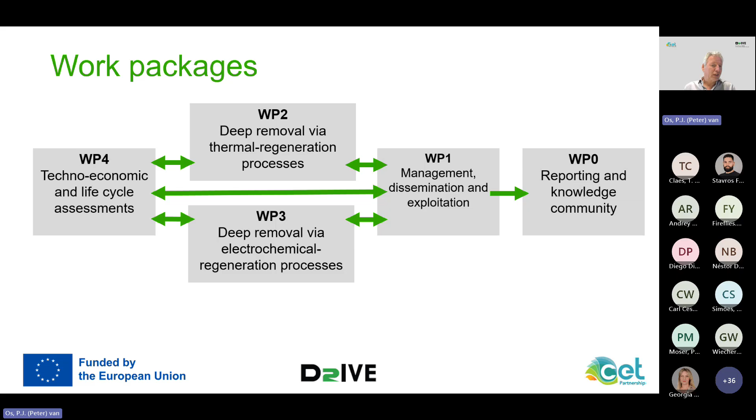In work package 2, we look at CO2 removal via thermal regeneration processes. In work package 3, we look at CO2 removal via electrochemical regeneration processes. And work package 4 concentrates on the techno-economic and life cycle assessments.

This is a graph that we made in the project proposal about the work that we do in DRIVE. The thermal regeneration technology is based on amine CO2 capture, where we go to very deep removal rates. In the electrochemical regeneration, we look at 2 technologies that are being further developed in the project. We also have a techno-economic work package that looks at a lot of different cases: cement, waste to energy, coal-fired power, and combined cycle power, considering different capture rates. We also want to compare the thermal and electrochemical regeneration processes.

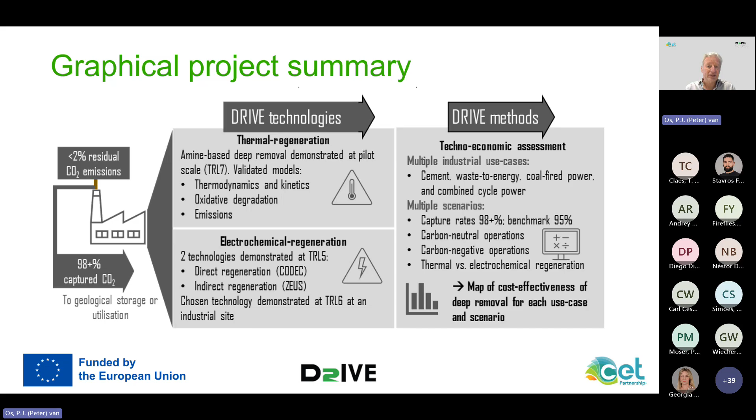This is an overview of the TRL levels that we have in DRIVE. CODEC and ZEUS are being further developed in the project. There was already a basis, but we'll try to optimize both processes and demonstrate them in the lab, and also increase the performance of both processes.

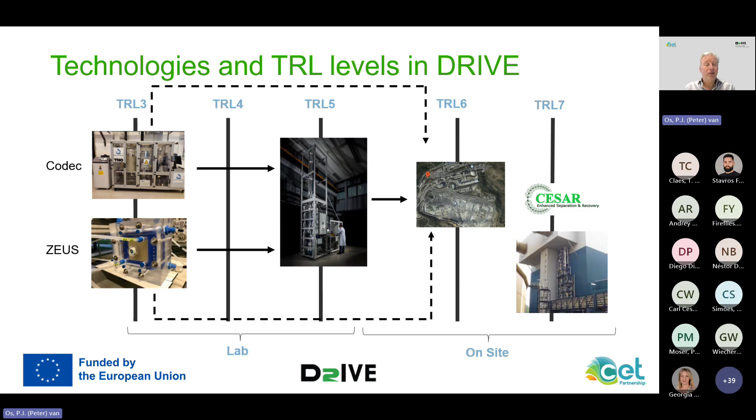In the lab, we will also test it with a CO2 capture plant. We have a small complete CO2 capture plant called the mini plant, and both technologies will be operated in the lab. Then one of the technologies will be selected for an on-site operation at a plant of Cemex in Czech Republic, where we will transport our mini plant and one of the 2 electrochemical setups, and operate there with the flue gas of the Cemex plant.

Of course, the CO2 capture with amines already has a much higher TRL level, and we are using the CO2 capture plant of RWE in Niederaußem to really look into the deep removal of CO2 using this plant.

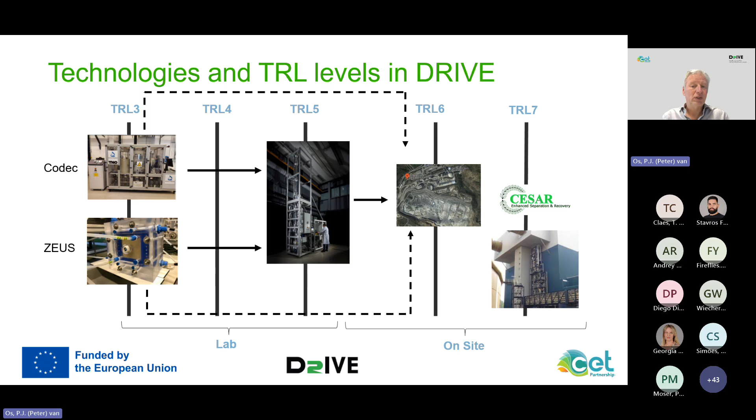The project objectives: we really want to demonstrate deep removal at TRL 7 at the RWE plant with CESAR1 solvent. Quite some campaigns have already been done, and we are still further testing the solvent, concentrating on energy demand, emission degradation, and how it will operate. Peter Moser will tell more about this in his presentation.

Katarina and Diego will present the electrochemical regeneration technologies that we want to further develop in the project. In the last year of the project, we will operate one of the electrochemical setups in the Czech Republic, with a clear target for energy performance. At the end of the project, all results about technical, economical, and LCA aspects will be presented and published.

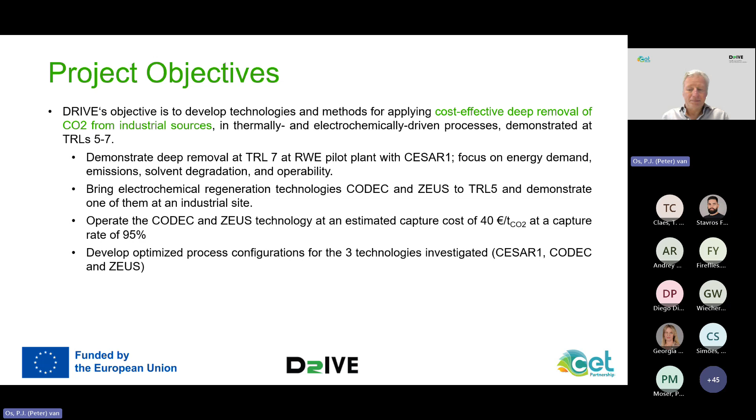What we really want to do is develop this electrochemical regeneration method much further, try to make steps in TRL level, and also see what it can mean for us and for the CO2 capture community in terms of performance and emissions. We really want to see if for the amine technologies, very deep removal works, and what the cost will be in terms of extra energy, degradation, and things like that.

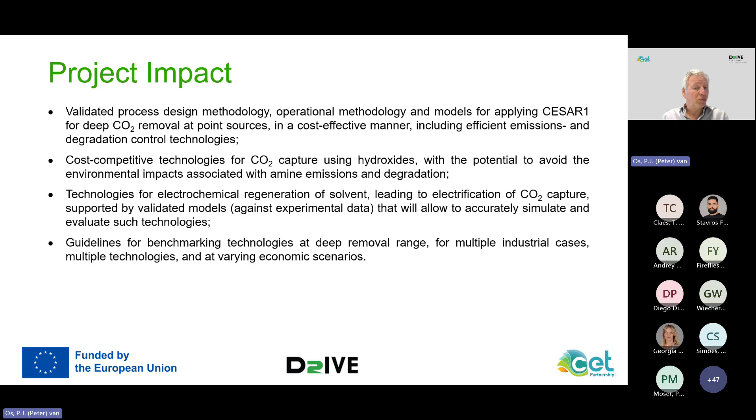So we have a very big demonstration activity in Drive, and we want to look for these multiple cases, what the benefits will be in different scenarios.

We tend to do a lot of dissemination in the project. We already have a website active since the beginning of the project, where we present our newsletters, results, and also the recording of this webinar will be uploaded.

We have a LinkedIn page where we regularly post news about the project, and a YouTube channel where we also post video material about the project. We're also preparing some video material about how the technologies we develop work, and of course we try to be present at major conferences to disseminate our results.

So this is still an overview of our partners. I think we have a very nice consortium with very technical, very specific targets, which gives a good direction to the project. And of course, we want to thank our funders for making this project possible. So this is a very short introduction.

I think we should now switch to the technical work packages, and I would like to hand over to Peter Moser from RWE to present on the thermal regeneration results.

Okay, thank you, Peter. I will share my slides. I want to start my presentation about this work package 2 on thermal regeneration processes for deep removal with an introduction of the objectives of the work package.

Our main goal is to confirm technical feasibility. We are not talking about achieving the highest capture rate for just some hours - we are talking about 24/7 operation in long duration tests. We want to understand and assess the impact of deep removal on key performance indicators: energy demand, emissions, solvent degradation, but also operability. Do we see effects you normally don't see at normal capture rates achieved at amine-based capture plants?

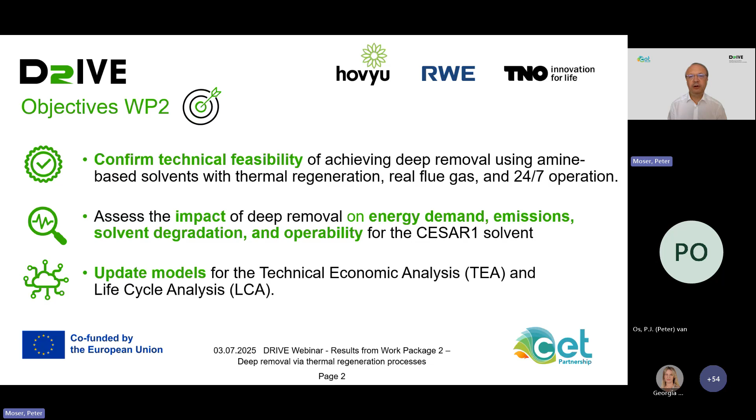We hand over this data to our colleagues in the other work packages for life cycle analysis, but also for techno-economic analysis. That means we can validate the modeling tools and understand what's going on in a process with deep removal, so that it can be scaled up for different use cases. So we have a quite holistic approach.

Our setup is that we use for the testing at Niederaussem the flue gas of a 1000 megawatt lignite-fired power plant. Our solvent is this aqueous blend of AMP and piperazine, the so-called CESAR-1 solvent, which you can say is now the working horse of the scientific community in Europe especially, but there is also, I think, more and more commercial interest in the solvent.

Our flue gas composition is around 14 to 15% by volume of CO2 and around 5% of oxygen. It's important that when we talk about the highest capture rate, we frequently calibrate our infrared analyzer for the depleted flue gas, since we have very low traces of CO2 left. We use a calibration gas with 200 ppm of CO2.

We tested different emission mitigation technologies. The benchmark is always a water wash, since this is the simplest configuration and helps you understand the process. But we also control emissions with a dry bed, or so-called OASE aerozone, as well as with an acid wash, where we usually vary the pH value.

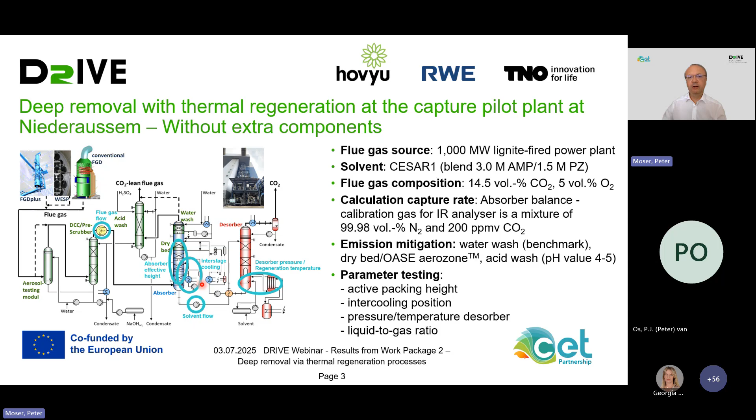But then we vary the solvent flow, the desorber pressure, and we also vary between using the full length of the absorber with 4 beds of structured packing or just 3 beds, the so-called dry bed configuration, which at the same time reduces emissions. We also varied the position of interstage cooling in the absorber, or tried operating without an intercooler.

Coming to the testing, we realized in total 5 testing campaigns, of which 4 have already been completed. In the first campaign, we operated the plant and tested whatever was possible, to gain hands-on experience on these highest capture rates and to get a nice set of data for the modeling tools.

In the second campaign, we operated with 3 active beds. In the third campaign, we had 4 active beds. I also have to explain that we have no permanently installed reclaiming system in the capture plant, so all trace components or degradation products accumulate over time.

After a total of around 15,700 operating hours, we exchanged the solvent. This was requested by another ongoing project at Niederaussem, and it was nice because we then had fresh CESAR-1 solvent in the plant, which was interesting for comparing performance.

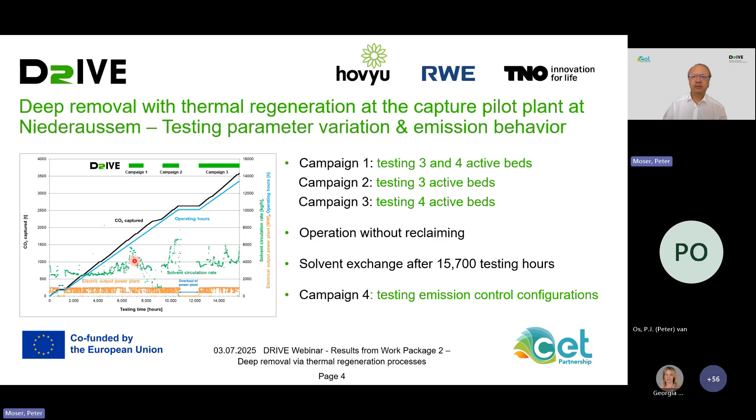You can see here this is the power plant output—when we have no flue gas, the power plant has a standstill and we cannot operate. But during this test, we significantly raised the solvent flow, doubling it or more than doubling it. That's just to explain a little bit how we tested it.

Coming now to the results regarding the key performance indicators—this is not astonishing: when we go to the highest capture rate, we see a quite steep increase of the reboiler duty. For CESAR-1, it's not so dramatic, perhaps until 99% capture rate, but if we go to the highest capture rates, it increases significantly. Nevertheless, you could say up until the range of 98–99% it's a moderate increase of specific reboiler duty, around 30%.

Regarding the aging of the solvent, the effect on reboiler duty is more or less linked to the amine concentration in the solvent. By degradation, depending on your solvent management, you are replacing active amine with degradation products, which sometimes still have an amine group and are active or provide alkalinity. Nevertheless, you end up with more inactive material in your solvent, which reduces the efficiency of the process—and that's also what we see.

For example, with 4-bed operation and 1.75 bar absolute pressure in the desorber as operating parameters, we see that we need around 10% more energy for the aged solvent, and this is mainly linked to the lower amine concentration.

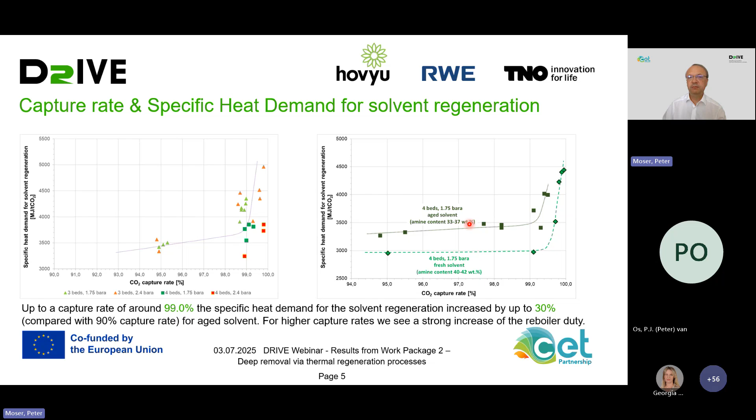Also important is the topic of emissions. We could confirm that at highest capture rates—here in the range between 98 and higher than 99%—we see the effect already observed in the Accelerating CCS Technologies project scope, which ended last year. We can confirm this also for highest capture rates: we see an increase in emissions for fresh solvent. Nevertheless, these emissions are quite too high for operating a plant, especially for AMP, but this data is important to understand the mechanisms of emission formation.

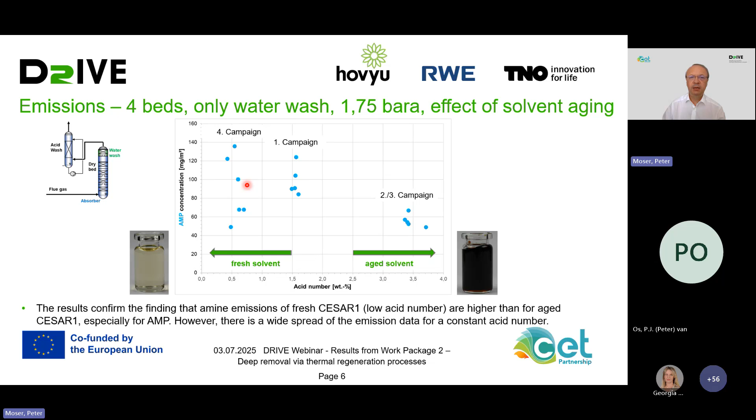Coming to the next slide, this shows that we have quite effective emission mitigation technologies available, so emission control for deep removal that works. We tested it under full load conditions of the power plant, but also part load conditions. Typically the emissions are a little bit lower at part load because we have less CO2 in the flue gas coming from the power plant, which means less heat of reaction from the carbamate formation released in the absorber, and then the volatile emissions go down.

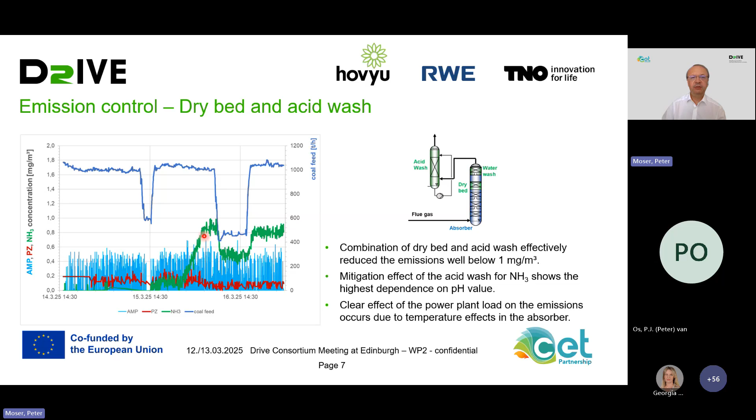You see also here the increase of the ammonia emissions. This is linked because we had variation of the pH value, and here we came a little less acidic, so higher pH value. Nevertheless, we have quite nice low emissions.

Important is to use the parameter data from the parameter test for the evaluation of the modeling tools, because in the end they will be needed for the techno-economic analysis. These are two diagrams we published at the GHGT-17 conference, results from 25 parameter tests. What we can say is that it's really quite good prediction of the behavior of the capture plant. For example, the key performance indicator capture rate is within 2% deviation between experiment and what the model predicts.

So this is nice, and what's also really promising is the prediction of the emissions. This is also quite nice, working well.

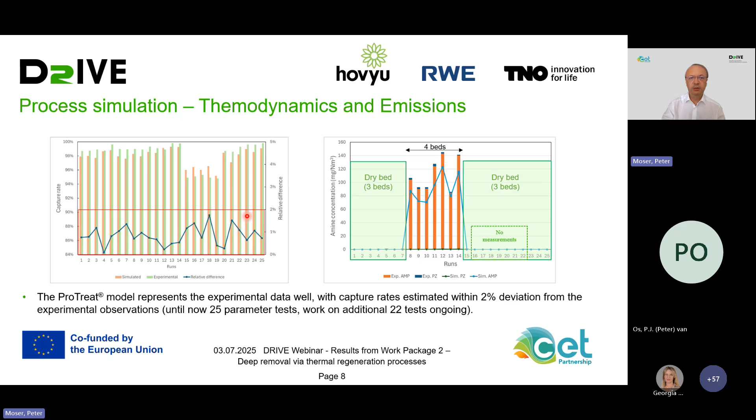For sure, you always have some scattering, and we see some underestimation of emissions which we are further investigating. There might be two reasons: one is that the equilibrium data might still not be accurate, though it has become much better as a result of the scope project, so there might still be some deviations. The other is that we might have to explain it by aerosol-based emissions, which cannot be predicted by the modeling tool. We use the ProTreat model, which seems to work quite well.

We demonstrated deepest removal, reducing the CO2 concentration in the depleted flue gas down to 91 ppm, which is really, really low. If we compare it with the concentration in the ambient atmosphere, we have to say 50% more specific energy demand that we need for it. So you can say that we capture, in the end, CO2 from the combustion air of the power plant.

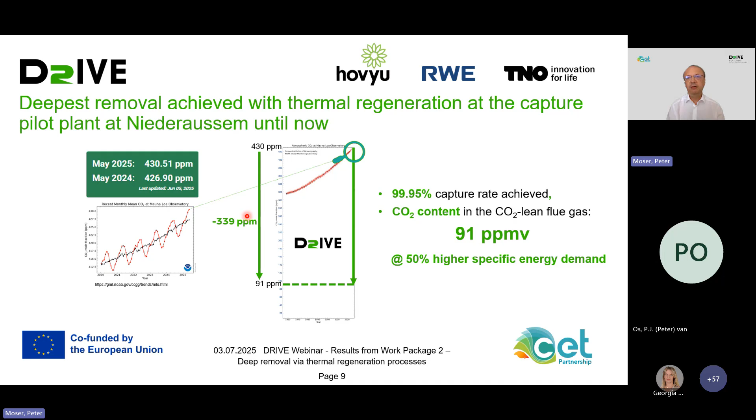This brings me to the conclusions. We have finalized 4 of the in total 5 testing campaigns, and we have shown that in principle it works. We have more than 3,800 operating hours now with capture rates higher than 98%, and CO2 concentrations below 100 ppm are possible, which was also one target of the DRIVE project. But we also have to point out that deep removal means a trade-off between highest achievable CO2 capture rates for climate protection, but on the other hand, higher energy consumption.

So what is now the conclusion from it? This will be the result of the techno-economic analysis and the life cycle analysis, which will investigate this for different use cases. We know that emissions can be controlled, and it seems that we have quite a nice simulation tool available to describe the behavior of the plant for these deep removal conditions.

From October this year, it is planned to realize the last testing campaign. This will be a continuous 6-month operation at deep removal conditions, and we will learn more about solvent degradation under these conditions. This will then also finalize the handover of data for the techno-economic analysis and the life cycle analysis.

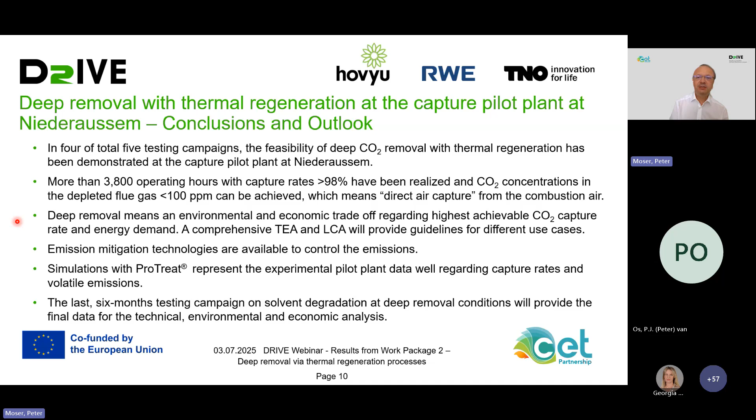Hello everybody, my name is Catarina Simões. I will be presenting work package 3 on the introduction to CODEC and ZEUS technologies, also with Diego from HOVYU.

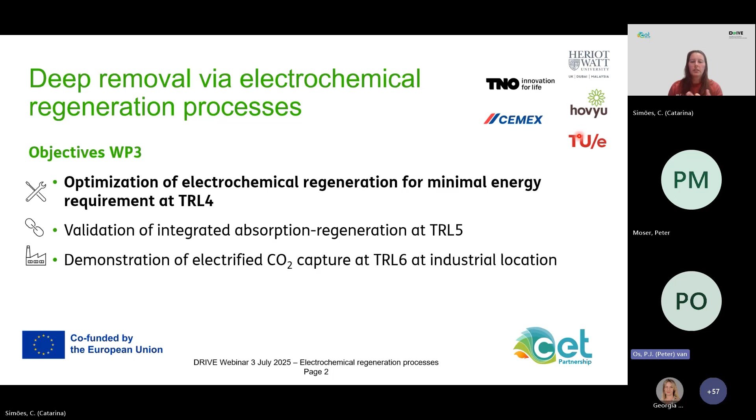Work package 3 is about CO2 removal via electrochemical regeneration processes. The objectives consist of optimizing the electrochemical regeneration for minimal energy requirement at TRL4, which is our current goal. Afterwards, we'll validate the integrated absorption-regeneration combination at TRL5, and finally bring one of the technologies to demonstration for electrified CO2 capture at TRL6 at the industrial location.

Why do we want to electrify the regeneration of CO2-rich capture solvents? There are several reasons. We can regenerate inorganic capture solvents, reducing the need for amines. We use inorganic salts like potassium hydroxide, which means no issues with degradation, and we can operate at room temperature, reducing thermal costs.

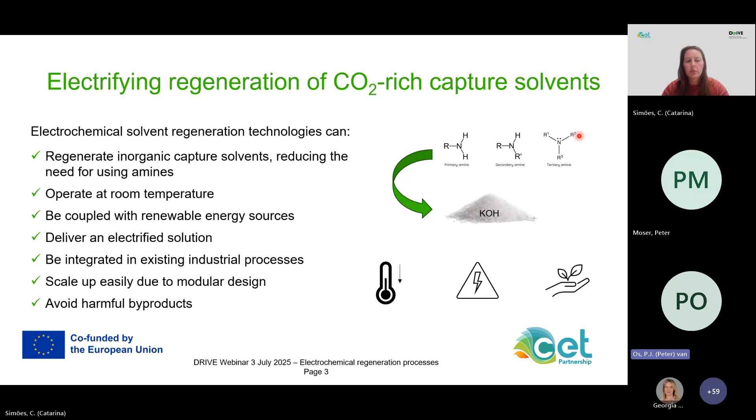We can couple this electrification with renewable energies, delivering an electrified solution, and it can be integrated into existing industrial processes. There's also ease of scalability, since the electrochemical reactors are based on a modular design, and we avoid harmful byproducts since the regeneration of KOH is constant.

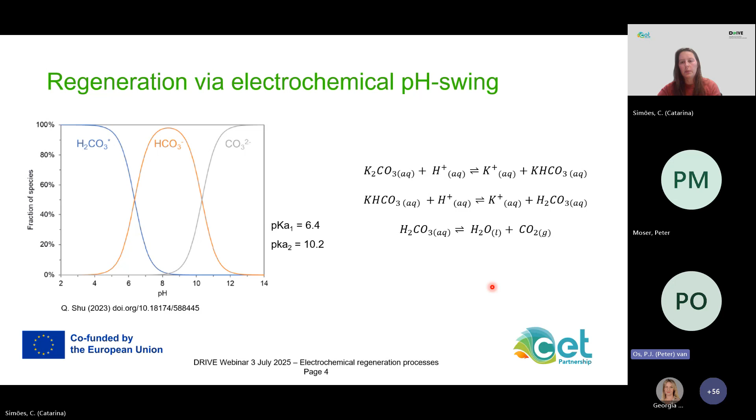On one side, we have CO2 release at the anolyte by acidification, as shown in the previous slides. At the same time, in the catholyte, we are regenerating the KOH, which can be directly used in the absorption step. The goal of this process is optimization towards 3 gigajoules per ton of CO2.

We also have water present in the system, which oxidizes at the anode, producing oxygen and protons. The protons react with the carbonate, releasing CO2 from the carbonic acid, along with oxygen.

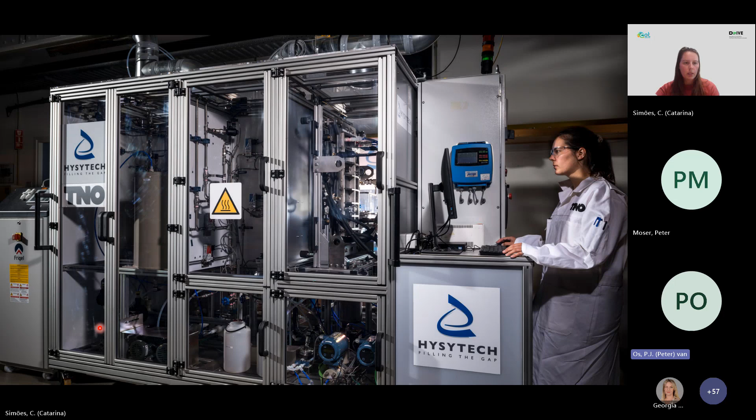This is how the setup looks in the lab these days. Here in this compartment is our electrochemical reactor. On this side is all the coordination of the sensors. Then we have the pumps, the gas management, and behind are the tanks, which can go up to 60 liters capacity.

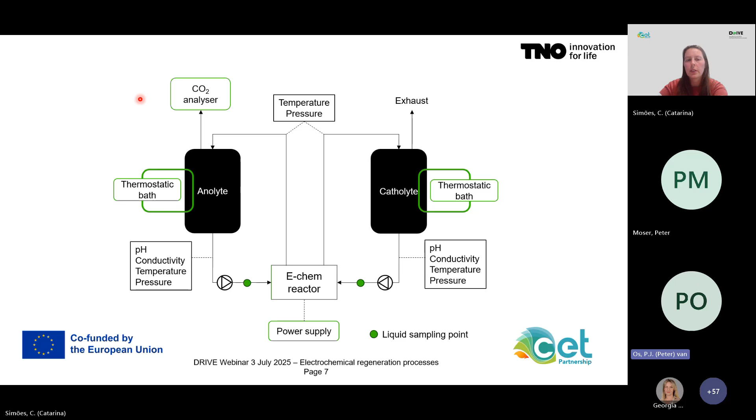This is a simple schematic of how it looks in operation. We're currently running in batch mode, so the anolyte is recirculating on this side. We measure in-line pH, conductivity, temperature, and pressure, and also take liquid samples. The catholyte is a mirror of the anolyte, but in the anolyte we still have a CO2 analyzer, so we can quantify how much CO2 is released from the system.

So we are doing optimization of CODEC. The parameters we're looking into are conductivity promoters, compartment geometry in the reactor, solution composition, and the applied current, which will also change the CO2 release rates. Finally, we want to implement gas diffusion electrodes to improve the system, because this will reduce potential losses and also avoid the mixture of CO2 and oxygen, which was still an issue in the last configuration.

We want to have a pure CO₂ outlet and not a mixture. So in this case, the setup becomes a bit more complex, and we now have two gas compartments from the anolyte and catholyte. We basically have a loop of hydrogen where we feed hydrogen to the anolyte, and this reacts instead of water. So now we don't have oxygen evolution. The rest of the system is rather similar.

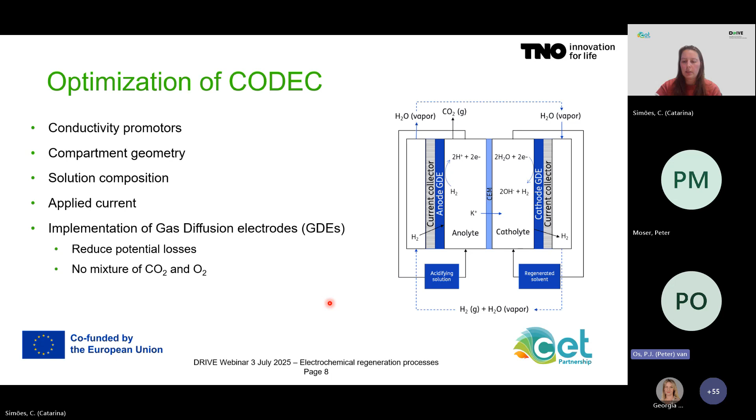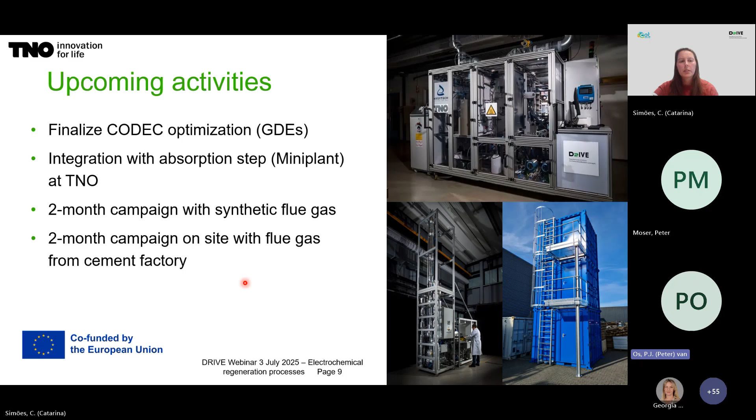For upcoming activities, today was just about showing how the technology works. We are now finalizing the CODEC optimization with the application of gas diffusion electrodes testing. Afterwards, the plan is to integrate with the absorption step, the mini plant. You can see pictures of how the mini plant looks, and both setups will be integrated together. With this, we'll have a 2-month campaign with synthetic flue gas, making an automated continuous system to test it. Depending on performance, there might be a 2-month campaign on site with flue gas from the cement factory. With this, I would also like to acknowledge the funding agencies and thank you for your attention.

And I'll now pass the word to Diego to continue on work package 3 with ZEUS.

It seems that my camera is not willing to switch on. Let's see if I manage now. No, we will try to solve this. Oh, now it's okay. Great, I'm here.

Okay, so continuing on work package 3. I'm going to present now the second electrified technology, which is called ZEUS, and that stands for Zero Emission Ultra Stripping.

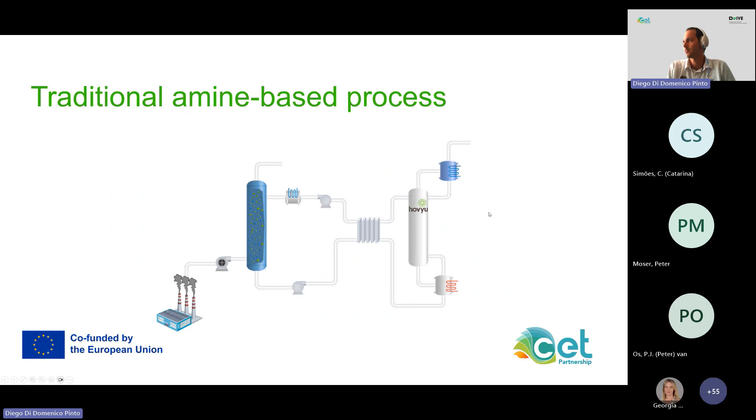For that, I want to give a small overview on a traditional amine-based process, which is the state of the art nowadays for capturing CO₂. In the traditional process, we have the absorber that removes CO₂ from the gas, and then the solvent is sent to a stripper, which works with thermal regeneration, as we saw Peter Moser present with the RWE plant. Then CO₂ leaves at the top of the stripper, and the regenerated solvent goes back to the top of the absorber. In our case, similar to CODEC, we want to exchange the regeneration part to an electrochemistry-based regeneration step instead of using thermal energy.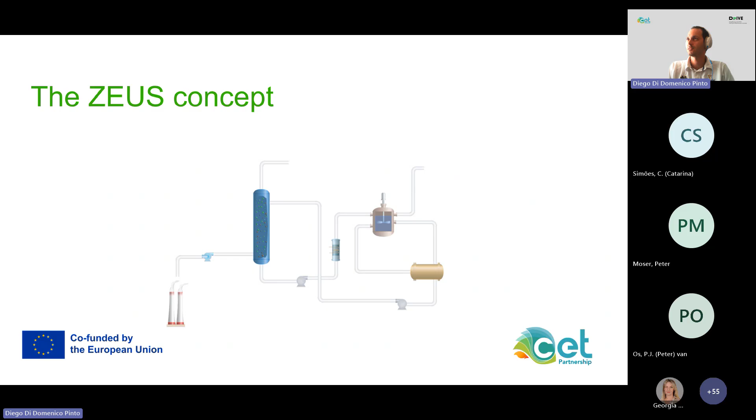And the ZEUS concept will look like this. The absorption part will stay more or less the same. Instead, the regeneration part will be exchanged to the process respective to what we want to achieve with electrifying it. So basically what we can achieve with ZEUS is a two-step regeneration system that's a little bit different from what Catarina presented. We have a first step where CO₂ is released, and this CO₂ can later be released under pressure. Then there's a second step where you use electrochemistry to regenerate the agent, as I call it now, and the solution goes back to the absorber.

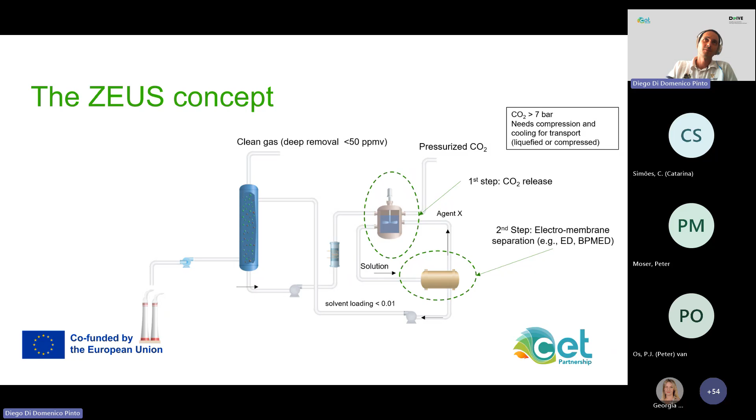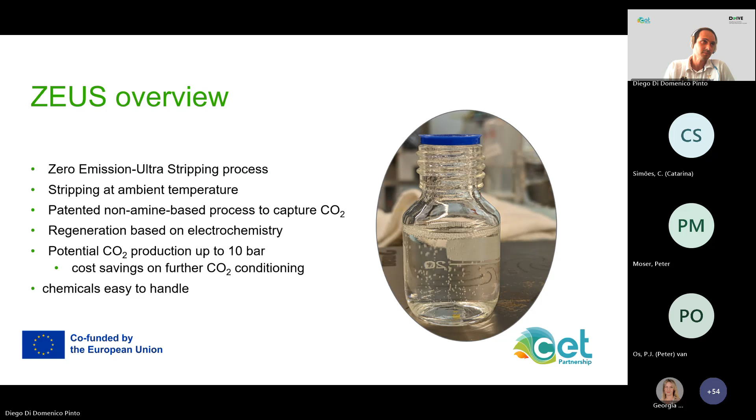So a little overview on ZEUS. As I mentioned, the name stands for Zero Emission Ultra Stripping process. We can strip CO₂ at ambient temperature, as you can see here in the picture. The small bubbles here are the CO₂ actually being stripped from the solvent. This process had a patent filed for it, and now we are planning to optimize it and implement it at large scale. There is potential to produce CO₂ up to 10 bar. We did some tests, desorption up to 9 bar, and managed to achieve desorption under those pressures. The chemicals we use are easy to handle and easy to find.

Just a comparison, we did a theoretical comparison with MEA targeting 95% removal, for a waste-to-energy case, also using two types of solvent under the ZEUS technology. We managed to achieve below 50 ppm with ZEUS, and that will be confirmed now in the next steps for the experimental plan.

Just the status of where we are now: we have a partner, Eindhoven University, working on the development of new materials for this process, and they are now characterizing and optimizing a new membrane to be used in the bipolar membrane part.

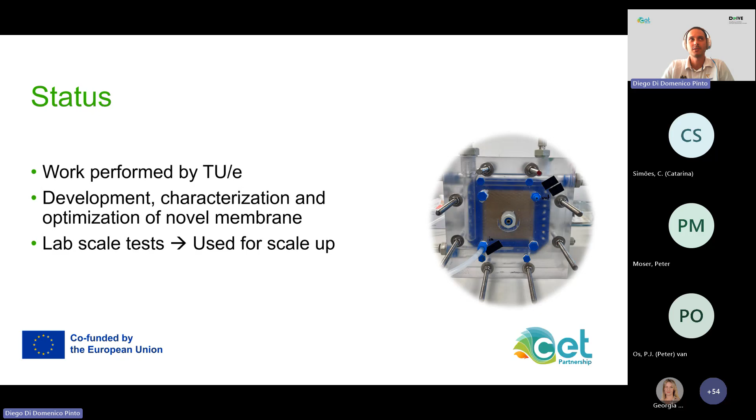Those are now on lab scale tests, and will be used for the scale-up test that we plan to do. We also built a skid for demonstrating this. The capacity of this skid is about 3 kilos of CO₂ per hour.

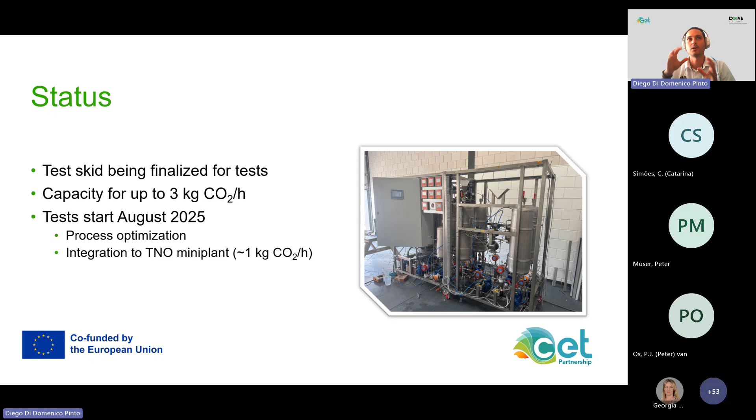The skid is finalized, so we are now integrating the electromembrane part so we can optimize it, and then we will bring it to TNO for integration with the absorber, and validate the whole process, absorption and desorption. TNO's mini plant has a capacity of about 1 kilo per hour, so our skid is well fitted for that.

Thanks a lot, Diego. I hope we were able to give you a taste of what we are doing in Drive, and also the current status. I have a few slides on the work that is coming, so I will put them up.

So what's next? As Peter already mentioned, we're going to do further testing at the RWE pilot in Niederaussem, in much longer campaigns. We've had a few shorter campaigns, now we're doing longer campaigns to address the degradation and emission behavior in deep removal.

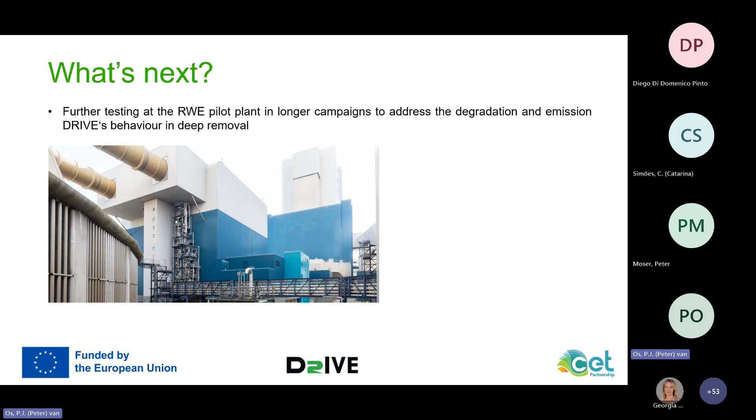As a consortium, we think it's really key to have these longer-term campaigns to see if there are any disadvantages that pop up when you test a lot longer. It's really nice that we can do this in the project. And of course, the RWE CO₂ capture plant already exists for a very long time and has many operation hours, so we could immediately start testing this kind of technology in this plant. That was really nice.

Also, we're going to do further testing of the CODEC and ZEUS in the lab to optimize the configuration and determine the performance. A task in the first year of the project was to define the KPIs to really see how we're going to compare both technologies, and how we're going to say this technology is more suited to go on site than the other.

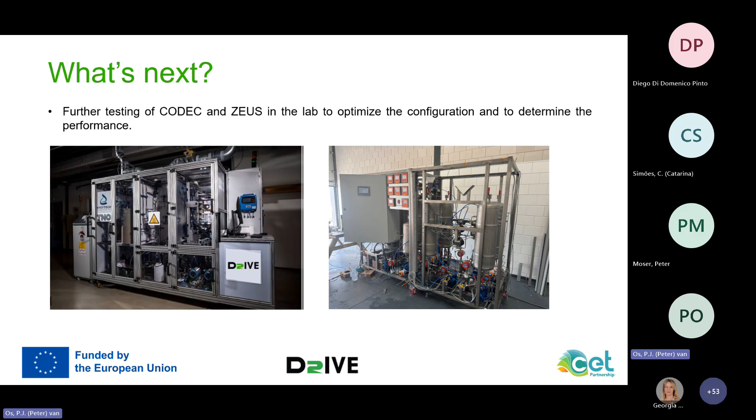We've done a lot of work to define these KPIs as a consortium, and the KPIs will also be published at a later stage, so others can learn how to do this kind of comparison. Then next year we are going to transport the equipment that's going to be tested on site to the Czech Republic.

We've already done an exploratory campaign where we measured the flue gas of the Cemex plant, so we know a bit what lies ahead when we test on site. We also looked at the plant to see where we can build up the equipment and what's needed in terms of utilities to run it on site. That's already ongoing since the first half year, working very closely with the plant to make this demonstration possible.

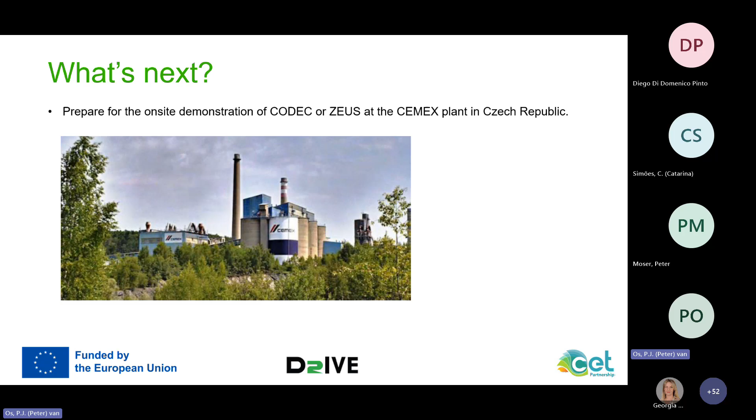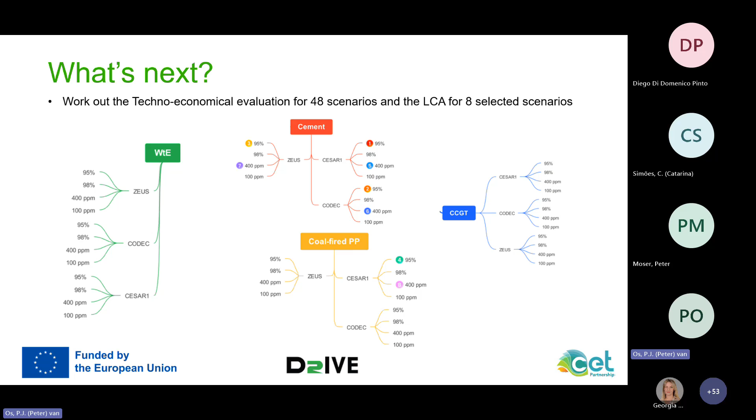From these scenarios, we will select 8 for an LCA. So from this work package too, a lot of results will become available toward the end of the project, showing how these technologies perform in different use cases, how they compare, and whether one technology might be preferred over another for a given use case. But that's more for the last 1.5 years of the project.